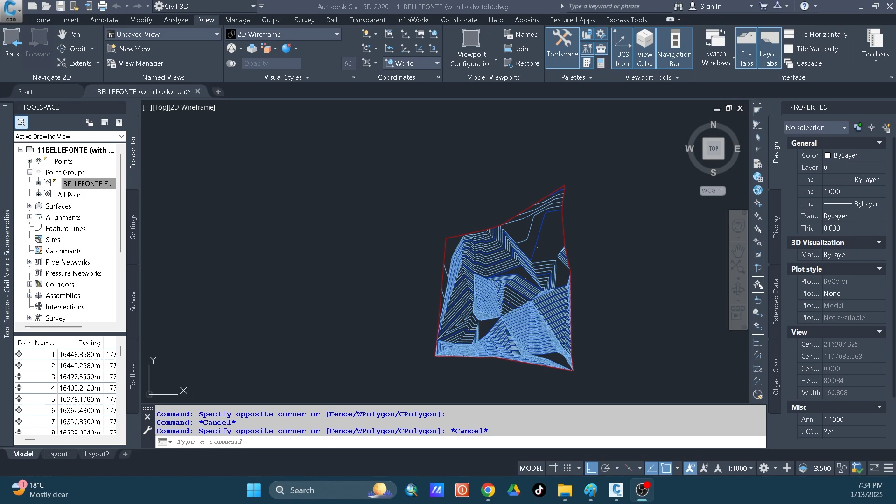Let's start. Since we already have the surface here, we have to show the point number under the Prospector tab, point group properties. Since this is none, let's put it to basic, and point number, apply, okay.

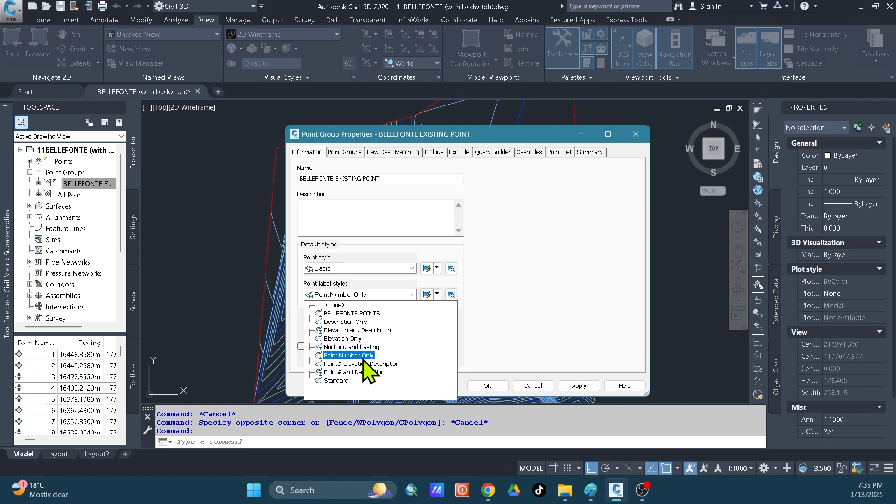So we have a surface, and you need only, for example, a stockpile, and you need only this area. Just look at the cursor. Since we need this only, we have to take this only.

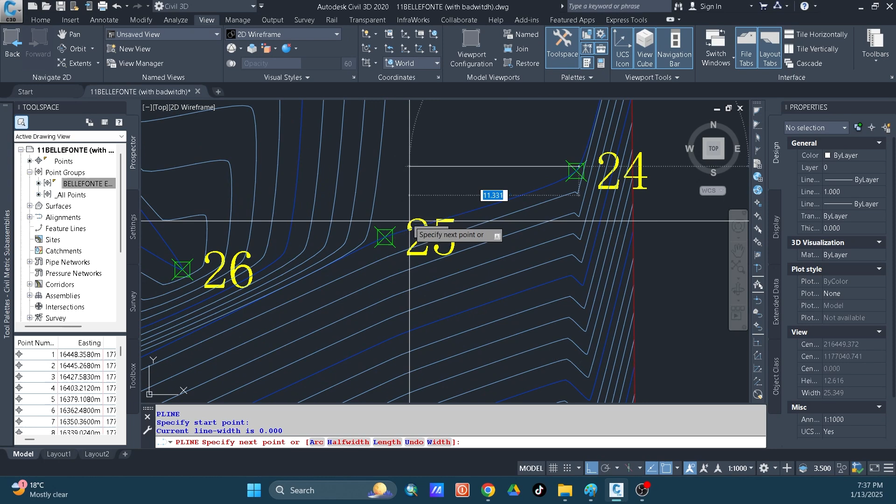And to take this, what you have to do... of course, you wouldn't do this process because it will take your time if you do this.

So what we have to do is, for example, let's get the lowest number, let's say 24, and we will get the highest number, let's say 59.

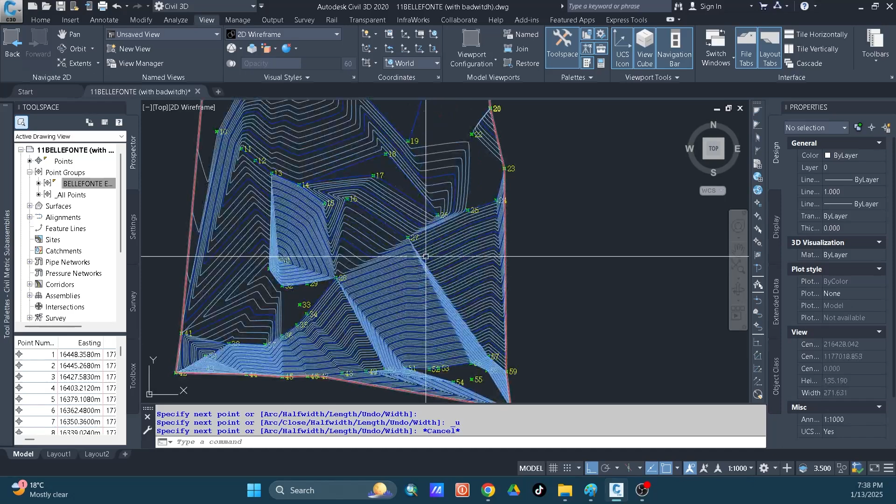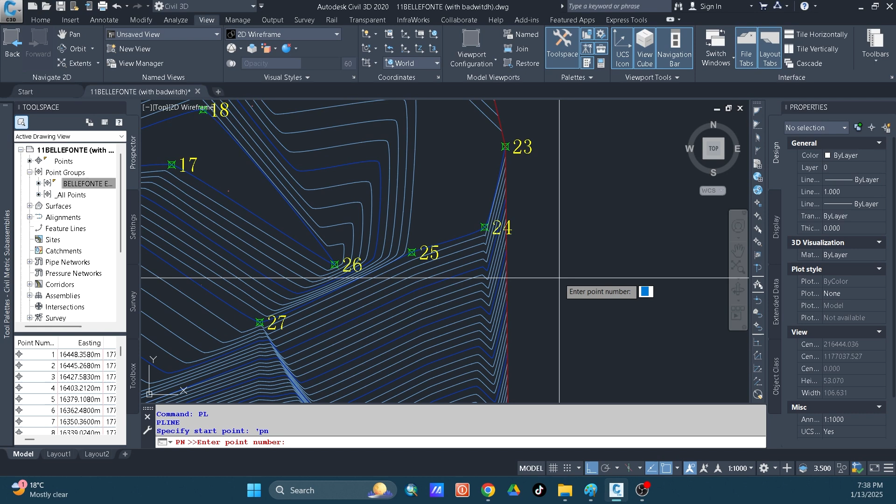What we have to do is command polyline, PL, and with the ongoing command PL, you can click this point number, or you can type apostrophe and then PN, which is point number, enter, and then just type 24 because that is the lowest number that we need, and then until, let's say 59. We don't need this area. 24 to 59, and then close.

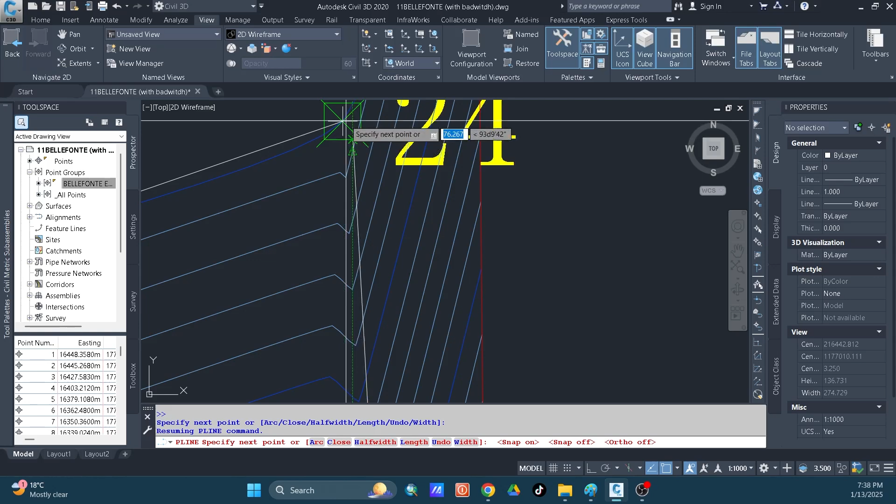Or we have to close this. Enter. So we already have a boundary.

This is our boundary. This is what we need only.

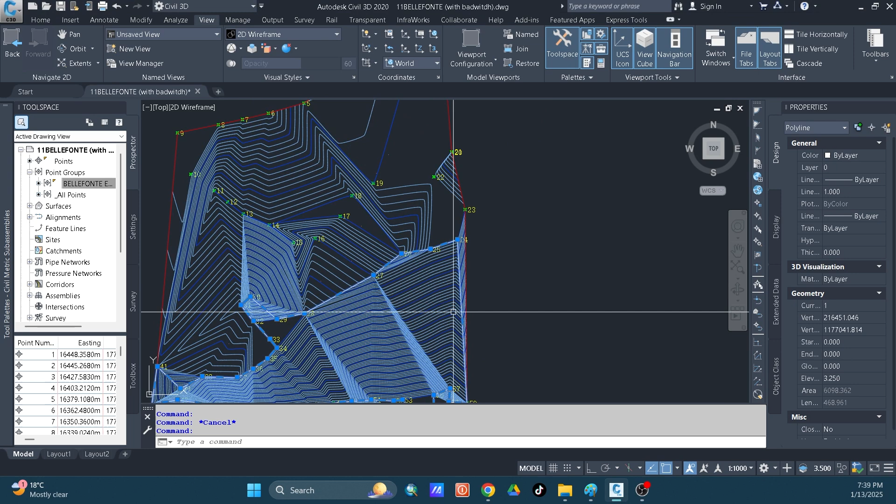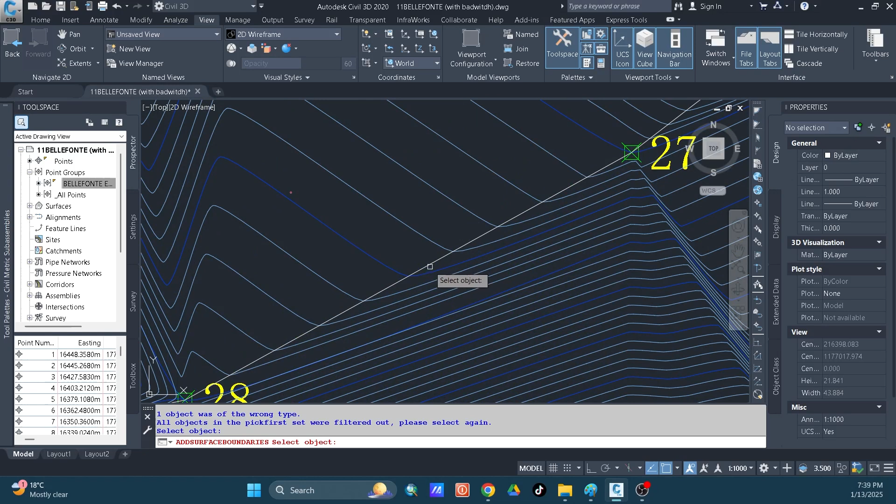And to cut this area, because we don't need that one, just click the surface, add data, and then select boundary. For example, this is a stockpile, and then outer, okay, and then select the boundary, and then it remains the surface that we need.

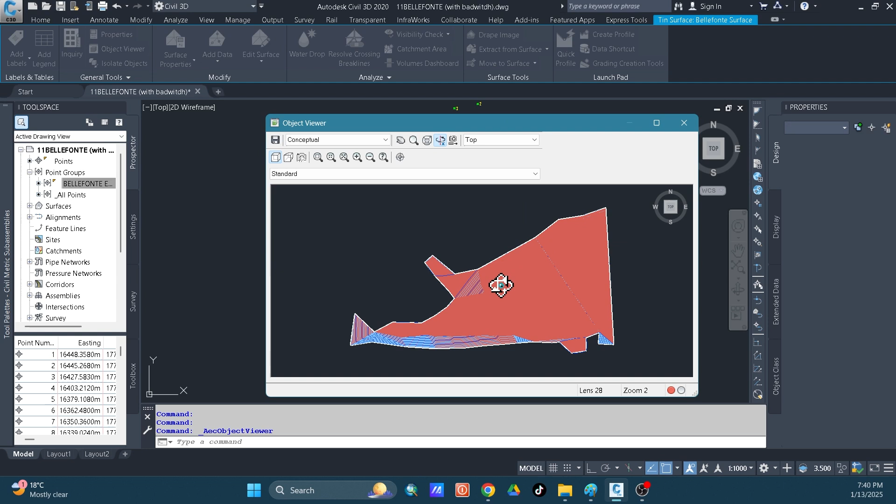Let's check the object viewer. For example, this one, object viewer. This is our stockpile. We need to see.